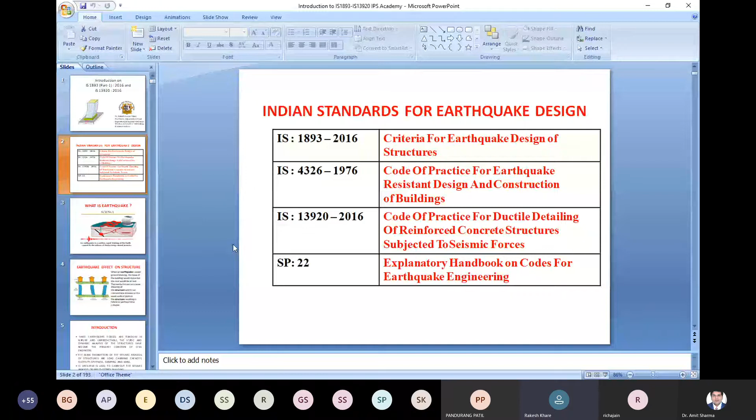You can do this in presentation mode, I think that would be better. F5 or something. Should I stick with this, sir? Skip, not escape. You can present in this complete presentation mode. If it is not possible, it's okay, otherwise the slide show would be better. It is not coming, sir. Actually, I have done this also. If people are comfortable, then it's okay. I think it's visible, okay.

So what is earthquake? An earthquake is a sudden, rapid shaking of the earth caused by the release of strain energy stored in rocks. Various theories are there: tectonic plate theory and elastic rebound theory. This presentation is not for the details of seismology, so I'll continue with the presentation.

Next slide, what is the effect of earthquake relevant to IS 1893 and 13920? Effect of earthquake: when an earthquake causes ground shaking, the base of the building would move, but the roof would be at rest. Inertia forces can cause shearing of the structure, which can concentrate stresses on weak walls or joints in the structure, resulting in failure.

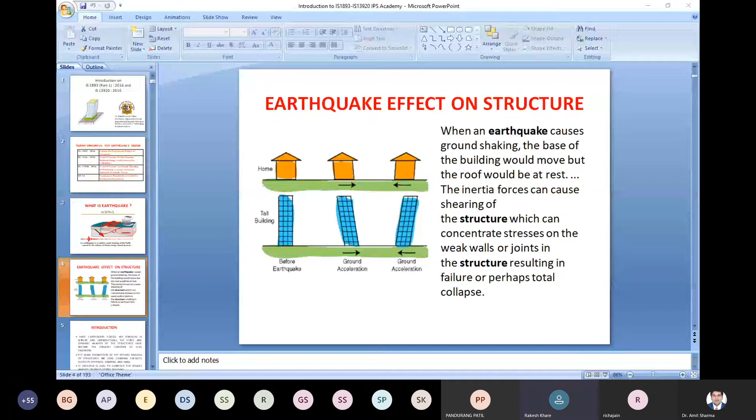Next slide. Since earthquake forces are random in nature and unpredictable, the static and dynamic analysis of the structure have become the primary concern of civil engineers. Main parameters in the seismic analysis of structures are load carrying capacity, ductility, stiffness, damping, and mass. IS 1893:2016 is used to carry out the seismic analysis of multi-story buildings.

Earthquake resistant structures.

Earthquake resistant or seismic structures are designed to protect buildings to some or greater extent from earthquakes. According to building codes, earthquake resistant structures are intended to withstand the largest earthquake of a certain probability that is likely to occur at their location.

What is the largest earthquake? The largest earthquake, or maximum considered earthquake, is the earthquake which has a probability of 2% in the design life of the structure. So 2% probability in the design life of the structure has a return period of approximately 2475, or about 2500 years.

And then there's the design basis earthquake, which has 10% probability in the life of structures. With a 50-year design life of the structure, that earthquake can occur in 475 years. That is, the return period of the earthquake will be 475 years.

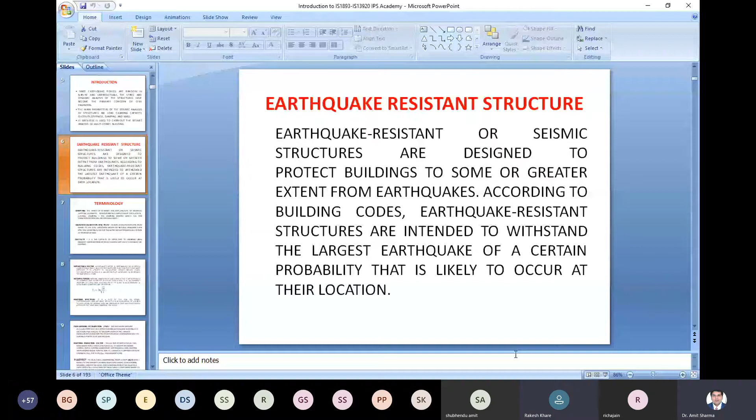Terminology used in IS 1893. They are: damping, the effect of internal friction, inelasticity of material, slipping, sliding, etc., and reducing the amplitude of oscillation. So that is damping.

The critical damping is the damping beyond which the free vibration motion will not be oscillatory. So that is critical damping.

Damping: generally 5% damping is present in the structure. We consider 5% damping for RCC structures in general, and even in steel and masonry structures also. Now in 2016, 5% damping is considered. Earlier, steel structures were considering only 2% damping. Now those structures are also having 5% damping as per the 2016 code.

Design acceleration spectrum refers to an average smoothened graph of natural frequency for a specific damping ratio for the expected earthquake excitation at the base of a single degree of freedom system. That is the design acceleration spectrum, which we use in IS 1893.

Ductility: it is the capacity of a structure to undergo large inelastic deformations without significant loss of strength or stiffness. That is what ductility is.

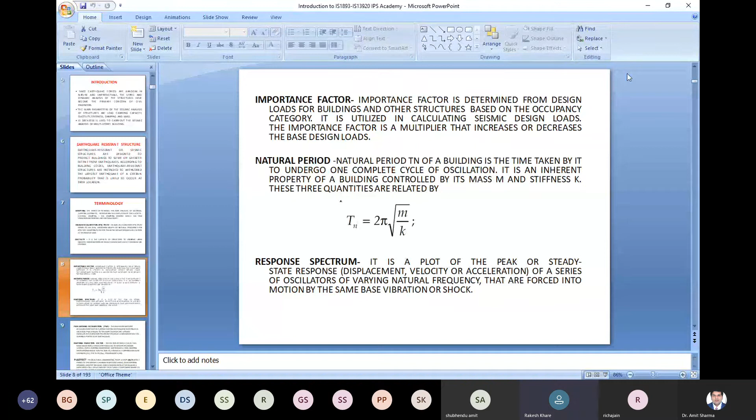They are different for different kinds of soil: hard soil, hard rock, medium rock or medium soil, and then soft soil. So three kinds of spectra are given in IS 1893. The response spectrum has, on the x-axis, capital T, and on the y-axis, SA over G, the spectral acceleration.

Peak ground acceleration: the maximum ground acceleration that occurred during earthquake shaking at a location, that is peak ground acceleration. This is equal to the amplitude of the largest absolute acceleration recorded on an accelerogram at a site during a particular earthquake.

Response reduction factor: by which the actual base shear force should be reduced to obtain the design lateral force during design basis earthquake shaking. The response reduction factor R basically depends on overstrength, ductility, and redundancy.

So what we do with the response reduction factor is reduce the earthquake force estimated by the maximum considered earthquake down to the level of the design basis earthquake. So we do not design for the largest earthquake, we design for the lower level earthquake and reduce it by, or divide it by, the response reduction factor, that is the R factor, which depends on strength, ductility, and redundancy.

In general, if IS 13920 is considered for detailing of RCC structures, then a special moment resisting frame has 5 as the response reduction factor. And if we do not consider it, for example in an ordinary moment resisting frame in zone 2, where it is not required, then in that case the R factor is 3, and it's different in different cases.

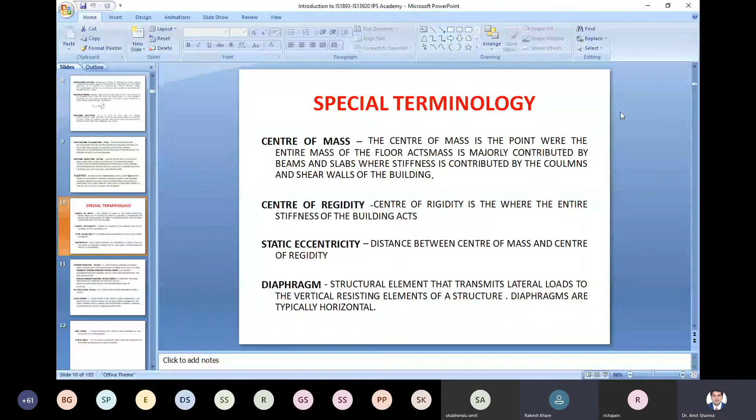Moment resisting frame: it is a rectilinear assembly of beams and columns with the beams rigidly connected to the columns. Ordinary moment resisting frame does not satisfy the criteria of IS 13920. A special moment resisting frame satisfies the criteria of IS 13920, that is, ductility is provided.

The special moment resisting frame and RC structural walls are RCC walls detailed and designed as per IS 13920. They will act as a lateral force resisting system, meaning they will resist earthquake forces. If they are not designed as per IS 13920, they will only resist gravity forces.

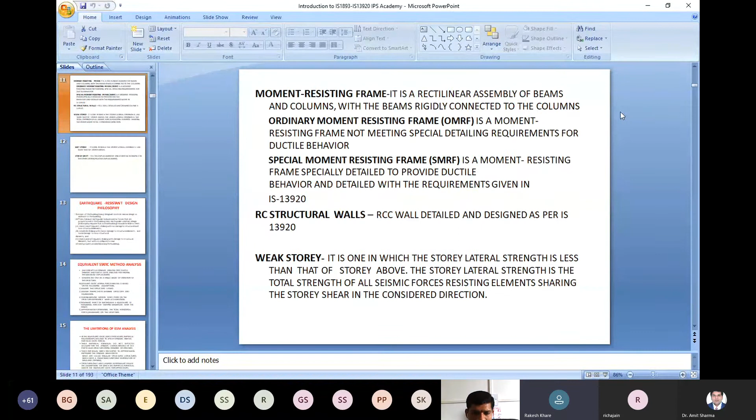Weak story is one in which the story lateral strength is less than that of the story above, so that story will be weak story. Lateral strength is the total strength of all seismic force resisting elements sharing the story shear in the considered direction.

Soft story is one in which the story lateral stiffness is less than that of the story above. So in weak story, strength is less; in soft story, stiffness is less.

Story drift is the displacement of one story with respect to the other story, that is, relative displacement between two stories. That is story drift.

Soft story: the Bhuj earthquake is known for soft story failure. There were many buildings having parking at the ground floor, so that floor was in fact a soft story. That story was soft story, and many of the buildings failed in the Bhuj earthquake.

Earthquake resistant design philosophy - I've told you about maximum considered earthquake. In case of maximum considered earthquake, we call it severe shaking also. So mass of the building being designed controls seismic design in addition to stiffness, because earthquake induces inertia forces that are proportional to the building mass.

Earthquake resistant design philosophy requires that normal buildings should be able to resist minor shaking with no damage to structural and non-structural elements, for minor and frequent earthquakes - that is design basis earthquake. Moderate shaking causes minor damage to structural elements and some damage to non-structural elements.

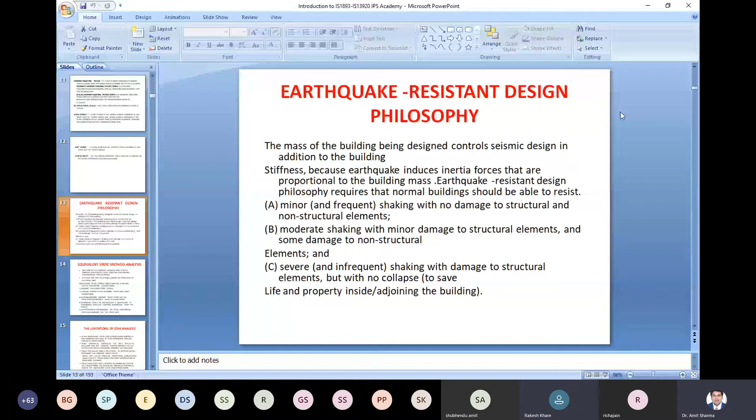Design basis earthquake is one earthquake which may repeat, or which has a return period of 475 years. And maximum considered earthquake is normally approximately 2500 years.

Equivalent static method analysis: when the earthquake occurs, it is transferred to the buildings as a response. That acceleration multiplied with mass gives you force, lateral force over the buildings or structure. So how can we design? There are two methods of designing structures: static method or dynamic method. In equivalent static, the phenomena is in fact dynamic, but we equivalently find out the static forces and design the structure. So the concept divides dynamic analysis into partly dynamic and partly static analysis for finding the maximum displacement.

It is restricted only to a single mode of vibration of the structure. We can show only single mode.

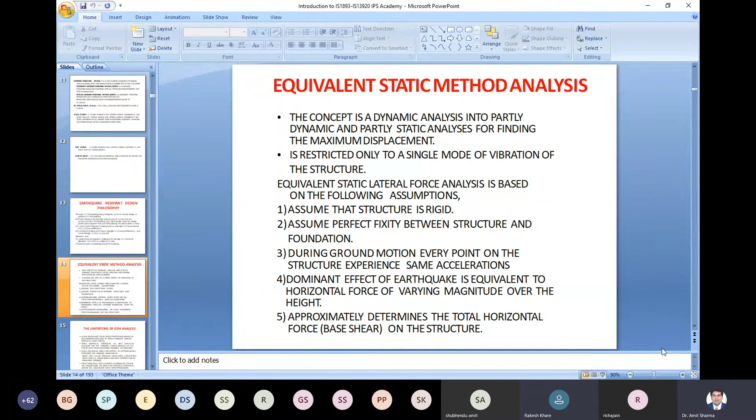Equivalent static lateral force analysis is based on the following assumptions: assume that structure is rigid, assume perfect fixity between structure and foundation. During ground motion, every point on the structure experiences the same acceleration. The dominant effect of earthquake is equivalent to a horizontal force of varying magnitude over the height, which approximately determines the total horizontal force, base shear, on the structure.

What are the limitations of ESM analysis, equivalent static method analysis? In the equivalent static force procedure, empirical relationships are used to specify dynamic and inertial forces as static forces. These empirical formulas do not explicitly account for the dynamic characteristics of the particular structure being designed or analyzed.

These formulae were developed to approximately represent the dynamic behavior of what are called regular structures, structures which have a reasonably uniform distribution of mass and stiffness. The structures that are classified as irregular violate the assumptions on which the empirical formula is used in the equivalent static force procedure. So in case of irregular structures, we need to consider the dynamic analysis.

Equivalent lateral shear force along two orthogonal axes. In fact, earthquake occurs in all three directions, but we design structures in general for two orthogonal horizontal directions.

Vertical direction normally is not required because the maximum earthquake which may occur in the vertical direction is equal to gravitational acceleration. So in that case, if it is downward direction, we have twice the forces, and more than this factor of safety is available in the structure. And if it is upward direction, then it is equal to the acting load, so there is no force in fact.

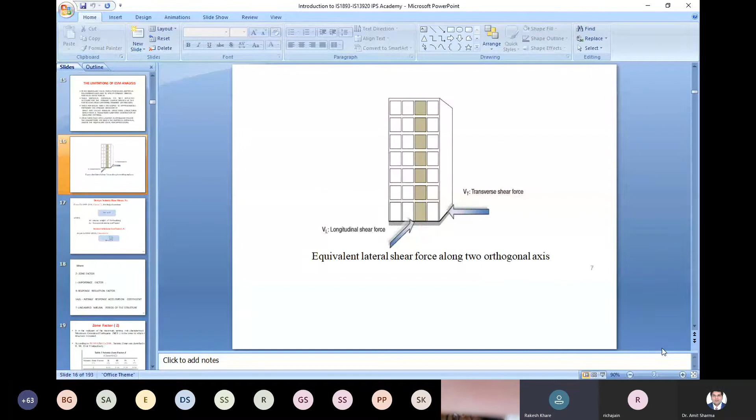Design seismic base shear: while designing these structures, we need to calculate the base shear VB. VB is calculated by AH into W. AH is the horizontal seismic coefficient, and W is the seismic weight of the building.

Horizontal seismic coefficient AH is given by clause 6.4.2, that is Z I SA by 2 R G, or Z by 2 into I by R into SA by G. We can split it like this: Z by 2, I by R, SA by G. Z is zone factor.

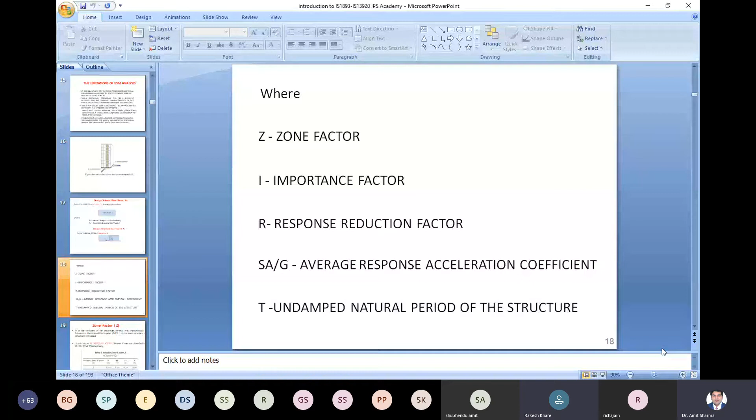I is importance factor, R is response reduction factor, SA by G is average response acceleration coefficient, corresponding to T, the undamped natural period of the structure. In fact, Z, the zone factor, is considered as maximum considered earthquake divided by 2, which you can consider as the design basis earthquake. Importance factor—already we have discussed hospital buildings or important buildings have more than one importance factor. So we increase the level of earthquake, then our response reduction factor, that ductility is considered, then we need to reduce the forces so that the structure is light. But of course the structure will damage and should not collapse, so to avoid collapse we need to provide ductility.

Zone factor is the indicator of the maximum seismic risk characterized by the maximum considered earthquake in the zone in which the structure is located. As per IS 1893:2016, it is divided into 4 zones: 2, 3, 4, and 5. Zone factors are given in Table 3: Zone 2 is 0.1, Zone 3 is 0.16, Zone 4 is 0.24, and Zone 5 is 0.36.

It is like peak ground acceleration—this is peak ground acceleration, 0.36 G in zone 5. I told you that the Bhuj earthquake had a level of 0.6 G, so in that way this value is definitely less.

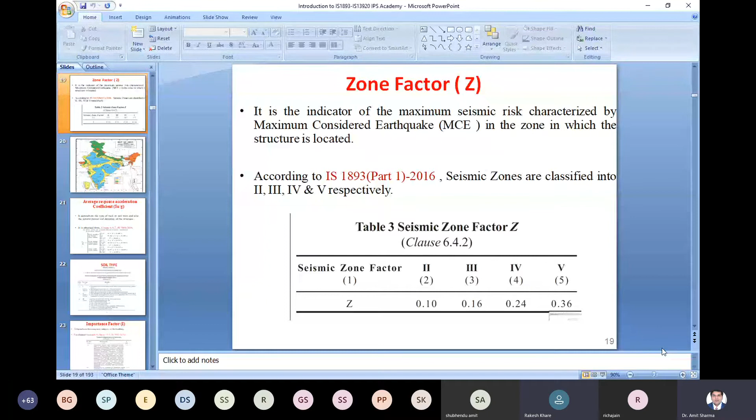But somehow our procedure is such that it takes care of so many things, and the structures designed as per IS 1893 do not fail during earthquake, at least do not collapse. They will not collapse at least during the severe-most earthquake. Definitely collapse will be avoided, though damage can take place.

Assam and other northeastern states, about 7 states, and then Bhuj in Gujarat, and a few places in Kashmir have zone 5. Near to that, zone 4 exists, and Delhi comes in zone 4. After that, other few places fall between zone 2 and 4—there is zone 3, like areas after zone 4 in Gujarat, and near there and in Maharashtra also some places, Madhya Pradesh a few places. So they are in zone 3, and south, Koyna and other areas, they are also zone 3.

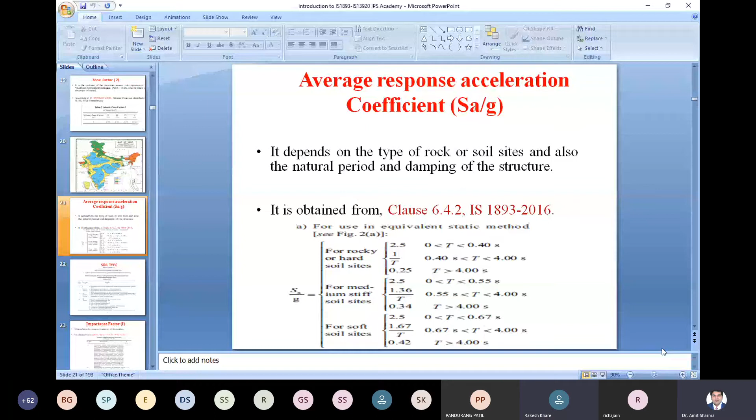Soil types are also defined by IS 1893. Soil type 1 is rock or hard soil, soil type 2 is medium or stiff soils, and soil type 3 is soft soils.

What is hard rock or hard soil? Well-graded gravel or well-graded sand, both with less than 5% passing 75 micron sieve, well-graded gravel-sand mixtures with or without fines, poorly graded sand or clayey sand, all having N above 30, and stiff to hard clays having N above 30, where N is the standard penetration test value, are considered rock or hard soil.

Medium or stiff soil has N between 10 and 30. Soft soil has N less than 10 - silts of intermediate compressibility, silts of high compressibility, clays, and likewise are soft soil.

Importance factor, already told you. The important building is 1.5. Now there is one category: residential or commercial buildings other than those listed, with occupancy more than 200 - this is an intermediate category, now introduced in 2016, that is 1.2, and all other buildings 1.0.

Residential buildings in general are 1.0, and if residential buildings have occupancy more than 200, or any commercial building also more than 200, with assembly involved, then it should have importance factor 1.2.

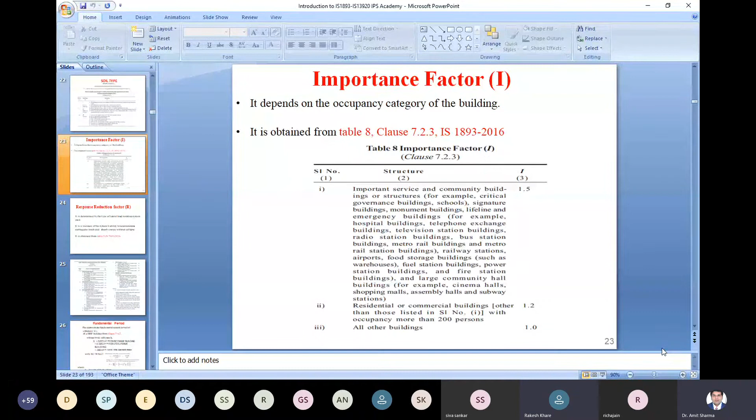Those structures have importance factor 1.5, and if they are industrial structures, it can be even higher than 1.5. IS 1893 part 4 is there for that - this was part 1.

Response reduction factor is determined by the type of lateral load resisting system used, the measure of the system's ability to accommodate earthquake loads and absorb energy without collapse. This is described in Table 9 of IS 1893 2016.

Response reduction factor for building systems: moment frame systems, OMRF 3.0, SMRF 5.0. Likewise for steel buildings - ordinary braced frames 4.0, special braced frames 4.5, and special braced frames having eccentric braces 5.0.

Structural wall systems: unreinforced masonry 1.5, unreinforced masonry designed with horizontal RCC bands 2.0, unreinforced masonry designed as per IS 4326 with horizontal RCC bands and vertical reinforcing bars 2.5, reinforced masonry buildings 3.0, confined masonry 3.0.

Why am I telling about masonry? Because even now 80% of buildings are masonry buildings. So buildings with ordinary RC structure have 3.0 and ductile RC structure 4.0. Flat slab structural system will have only 3.0, and if a flat slab is designed, it should have a lateral moment resisting frame also, some system for lateral moment resistance.

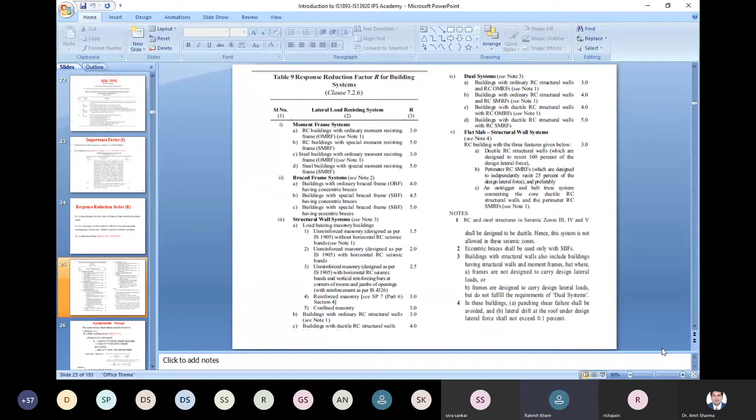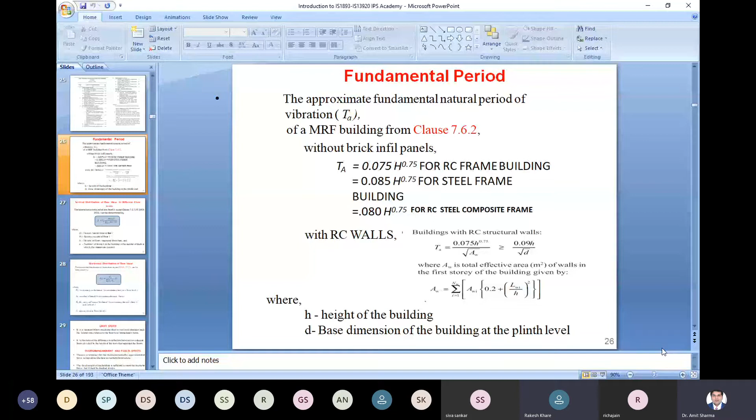Next slide is fundamental period. Approximate fundamental natural period of vibration is given in IS 1893, with the equation by which T is calculated - different for RC frame building, steel frame building, and buildings that may be steel composite or RC walls or other structures. So three equations are there; earlier there were only two equations.

Vertical distribution of base shear - base shear is calculated as VB equal to Ah into W, known to you now. How it is distributed over the stories: story shear QI equals VB multiplied by WI HI squared divided by sigma j equal to 1 to n of WJ HJ squared.

What is WI? Seismic weight of floor I. HI is the height of floor measured from the base. N is the number of stories in the building, number of levels at which the masses are located. So this way a quadratic formula is used by which the story shear is distributed. It also allows linear distribution - one who wants linear distribution can also use it.

Horizontal distribution of base shear is also defined, as per FEMA, for how the horizontal base shear is distributed.

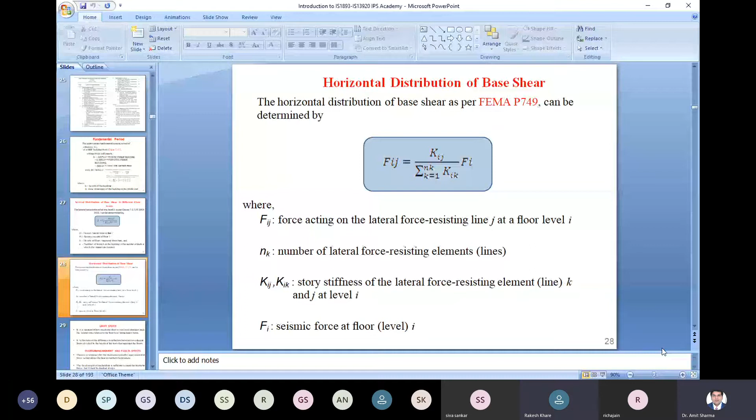Next slide, story drift. Story drift is a measure of how much one floor or roof level displaces under lateral force relative to the floor level immediately below. It is a ratio of the difference in deflection between two adjacent floors divided by the height of the story that separates the floors - so the drift ratio, story drift, is the difference in deflection divided by the story height.

There is a tendency for the moment created by equivalent static force acting over the base to overturn the structure. Dead weight of the building is sufficient to resist the overturning force, but it must always be checked.

Some considerations while calculating seismic weight: percent consideration of imposed load. Total live load is not considered for calculating earthquake forces. If superimposed load is up to 3 kN per meter square, only 25% of the mass is considered. If live load is above 3 kN per meter square, 50% of the live load is considered. This is because the whole live load may not be there in occupation, and it is moving, not fixed. If the imposed load is fixed at some place, full load must be considered. If not fixed, during earthquake it may change position and act in reverse direction, sometimes resisting the movement. So only 50% live load is considered.

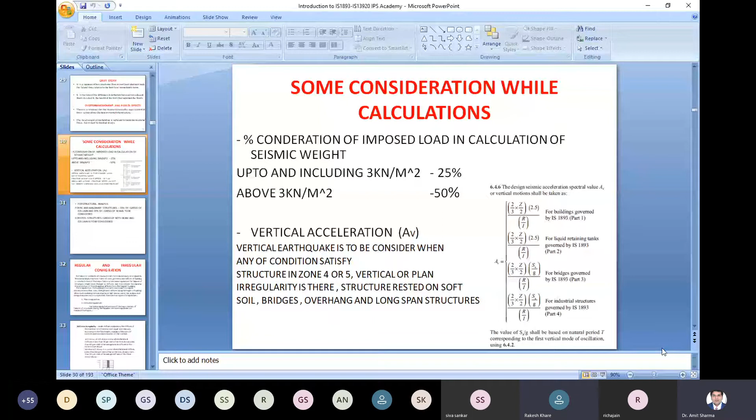For structural analysis of RCC and masonry structures, 70% of gross moment of inertia of column and 35% of gross moment of inertia of beam is to be considered, because cracking will take place. So 100% moment of inertia should not be considered for relative stiffness calculation. Column gross is taken as 70% since it is assumed columns crack less, while beams are taken at 35% since the tensile zone cracks totally and is resisted only by reinforcement. For steel structures, full gross moment of inertia of both beam and column is considered, since we do not reduce it when calculating earthquake forces.

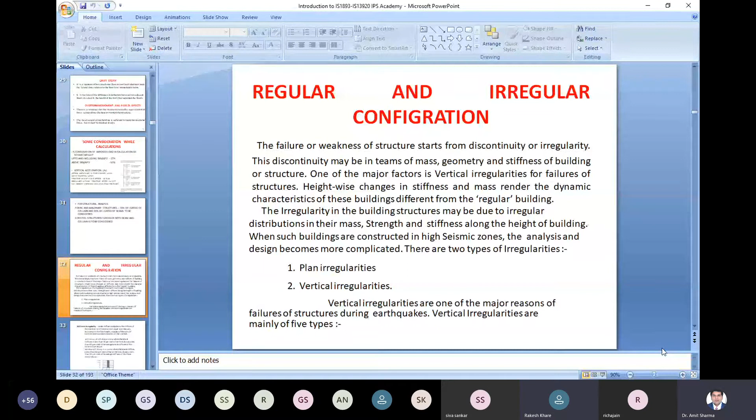Regular and irregular configuration: failure or weakness of a structure starts from discontinuity or irregularity, so these should be avoided. Two types of irregularities are defined: plan irregularities and vertical irregularities, which may arise due to irregular distribution of mass, strength, and stiffness along the height of the building. When such buildings are constructed in high seismic zones, analysis and design becomes more complicated. Vertical irregularities are one of the major reasons for failure of structures during earthquakes, and are mainly of 5 types.

Stiffness irregularity: the stiffness of members in a frame are not equal and vary according to floor height, modulus of elasticity of concrete, and moment of inertia of the member. Soft story is one in which lateral stiffness is less than 70% of the story above, or less than 80% of the average lateral stiffness of the 3 stories above. Extreme soft story is one in which lateral stiffness is less than 60% of that in the story above, or less than 70% of the average stiffness of the 3 stories above.

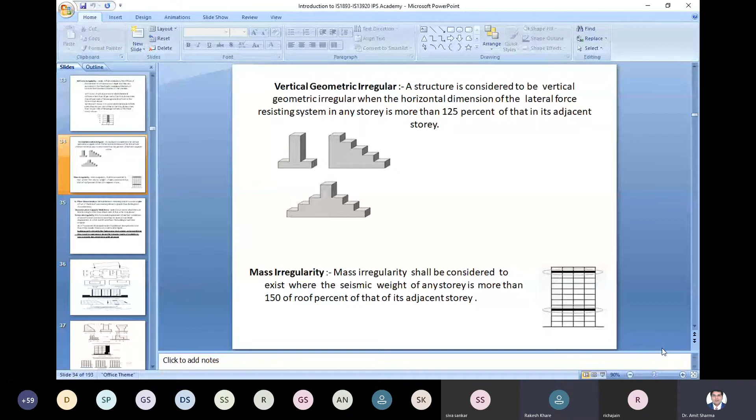A structure is considered vertically geometric irregular when the horizontal dimension of the lateral force resisting system in any story is more than 125% of that in its adjacent story. Mass irregularity exists where the seismic weight of any story is more than 150% of that of its adjacent story.

In-plane discontinuity may be possible in vertical elements resisting lateral force, where the in-plane offset of lateral force resisting elements is greater than the length of those elements. Discontinuity in capacity gives a weak story, which is one in which the story lateral strength is less than 80% of that in the story above. Torsional irregularity occurs when the maximum horizontal displacement of any floor in the direction of lateral force at one end is more than 1.5 times its minimum lateral displacement at the other end of the same floor; then the building is said to be irregular.

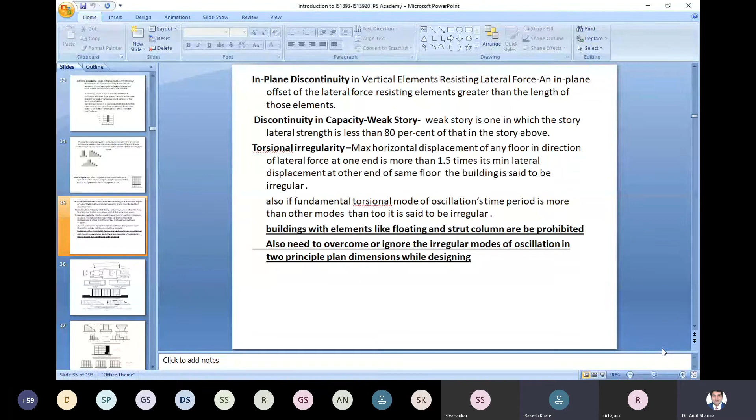Also, if the fundamental torsional mode of oscillation's time period is more than the other modes, the building is said to be irregular. Buildings with elements like floating and strut columns are to be prohibited. It is also necessary to overcome or avoid irregular modes of oscillation in the two principal plan dimensions while designing.

These are a few examples given in figure 3 of IS 1893, showing the definition of irregular buildings with plan irregularity. In the next page, figure 4 shows the definition of irregular buildings with vertical irregularities.

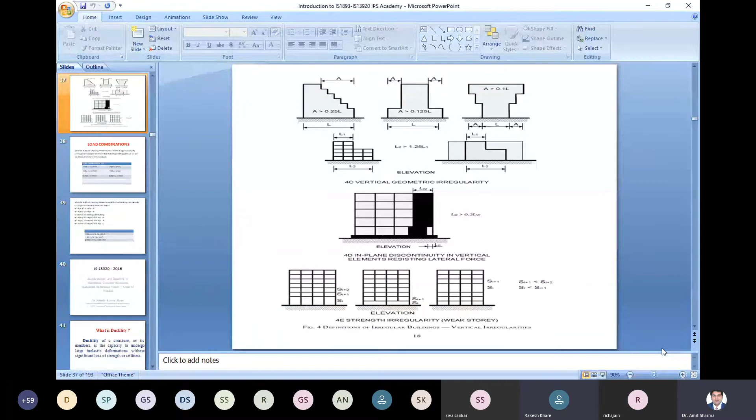And sometimes, if overturning moment is there, 0.9 times dead load is used. Stability is a question, so 0.9 times dead load. When dead load is providing stability against overturning, there is a probability of less dead load, so 0.9 dead load plus 1.5 earthquake load combination is also considered.

There are other combinations also when irregularities are there. When lateral load resisting elements are not oriented along two mutually orthogonal horizontal directions, then 0.3 times the other direction earthquake forces are also considered. And in case of 3D, the vertical direction earthquake is also considered. So these are the combinations in those cases of irregularities.

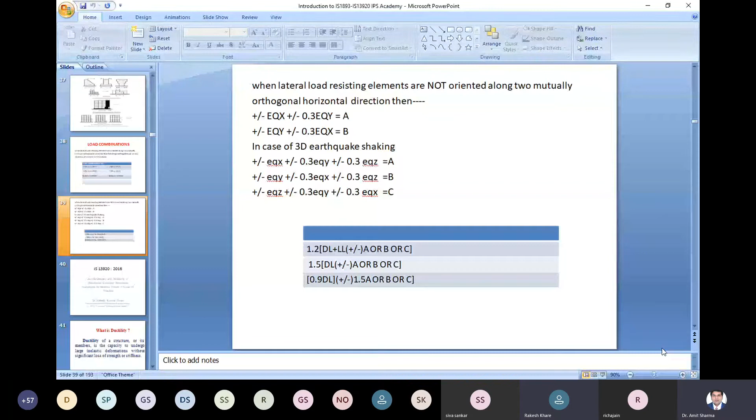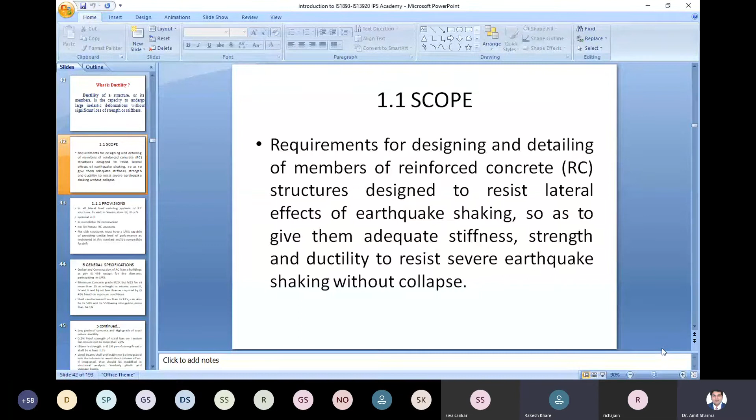The scope of this code is requirements for designing and detailing of members of reinforced concrete structures designed to resist lateral effect of earthquake shaking, so as to give them adequate stiffness, strength, and ductility to resist severe earthquake shaking without collapse. This is important. IS 1893 has a design philosophy that in the severe most earthquake, the maximum considered earthquake, structures should not collapse, and for RCC structure, if we want to avoid collapse, then this code is a must.

IS 13920 provisions are must. In all lateral load resisting systems of RCC structures located in seismic zone 3, 4, and 5, these provisions are mandatory. Optional in zone 2.

This applies to monolithic RC construction, not for precast RC structures. For precast RC structures, these provisions should be there, but there should be some special additional provisions also in precast. That is why it is said these provisions are not for precast RC structure alone - additional provisions would be required in joints and other things. Because in RCC structures, monolithic construction is there, so if these provisions are followed, monolithic construction will give good resistance. In precast, there are jointed connections, so even though you are providing these provisions, joints are weak, and it will be difficult to avoid collapse. That is why for precast structures, special provisions may be required.

Flat slab structures must have a lateral force resisting system (LFRS) capable of providing similar level of performance as envisioned in this standard, and be compatible for drift. So the lateral force resisting system should be there in flat slab structures.

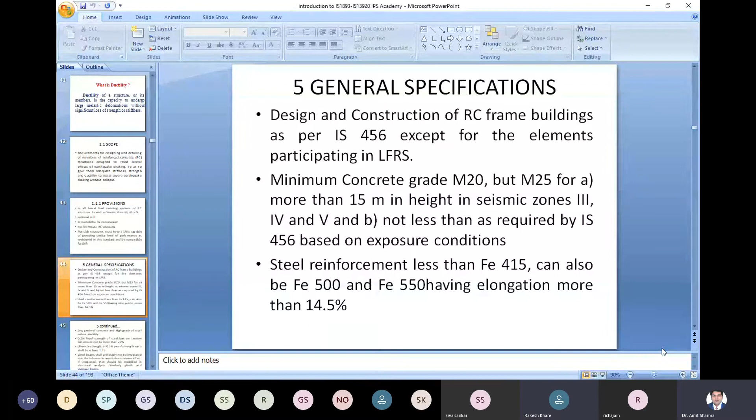Low grade of concrete and high grade of steel reduce ductility. That is why less than M20 is not used, and in buildings more than 15 meters high, M25 is recommended, and high grade of steel reduces ductility. But if it is giving 14.5% elongation, that is recommended. The 0.2% proof strength of steel bars on tensile test should not be more than 20%, and it is also recommended that ultimate strength to 0.2% proof strength ratio shall be at least 1.15, with a minimum 15% ultimate strength elongation.

Lintel beams shall preferably not be integrated into columns to avoid short column effect. If integrated, they should be modeled in structure analysis, similarly for plinth and staircase beams. If you do not model and provide it on site, there is a possibility of short column effect.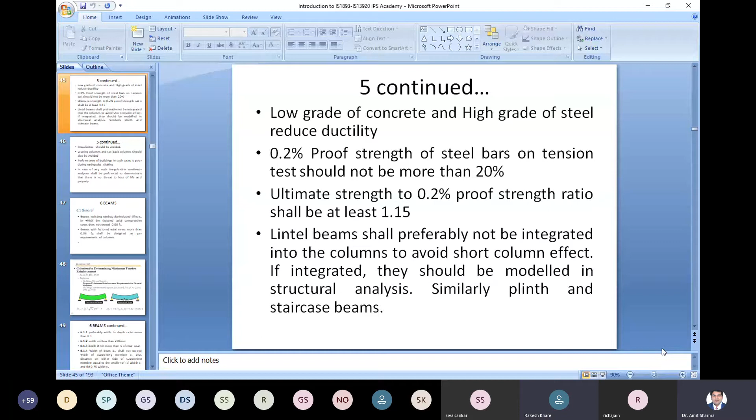What is short column effect? It is when you are designing a long column but providing a short column, so the column stiffness becomes higher and it attracts more force, and the distribution disturbs. Since it is not designed for that force, the column may fail.

Irregularity should be avoided. Leaning columns and setback columns should also be avoided. Performance of buildings in such cases is poor during earthquake shaking, which is why they should be avoided. In case of any such irregularities, nonlinear analysis shall be performed to demonstrate that there is no threat to loss of life and property.

What are the provisions for beams in flexure? Beams resisting earthquake induced effects in which the factored axial compressive stress does not exceed 0.08 FCK are defined as beams. If beams have factored axial stress more than 0.08 FCK, they shall be designed as per the requirements of columns also. Otherwise, if it is less, normal beam provisions apply.

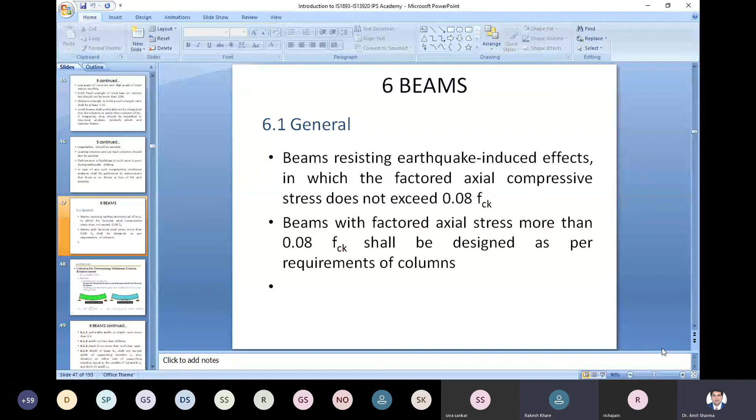What are the criteria for determining minimum tension reinforcement? As in IS 456/1978, there are some references by which the minimum criteria for determining minimum tension reinforcement are given.

For beams, preferably the width to depth ratio should be more than 0.3. Width should not be less than 200 mm in any case. Depth D should not be more than 1/4 of clear span. Width of beam shall not exceed width of supporting member C2 plus distance on either side of the supporting member, equal to the smaller of width C2 and 0.75 times the width.

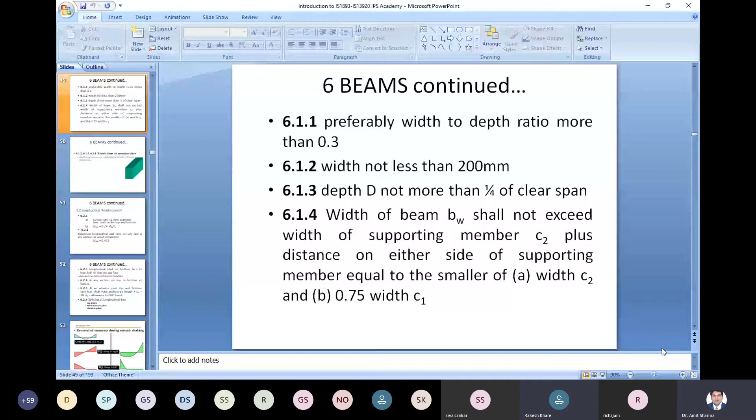Restrictions on member sizes exist because ductility provisions are valid only for members of usual proportions. If abnormal proportions are present, ductility will not be achieved.

Longitudinal reinforcement: at least two 12 mm diameter bars, each at top and bottom, so minimum 4 bars total. Rho minimum, the minimum reinforcement ratio, is 0.24 times square root of FCK upon Fy. The maximum longitudinal steel ratio on any face of any section, to avoid congestion, Rho maximum is 0.025, meaning 2.5% steel is the maximum that should be provided in beams.

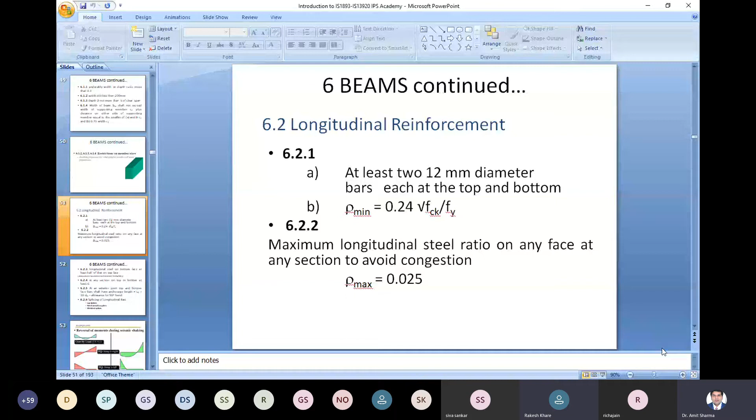Longitudinal steel on the bottom face should be at least half that on the top face. At any section, top or bottom, at least 1/4 of the reinforcement should be present. This clause, 6.2.3, is very important: bottom face at least half. Near support, whatever top steel is provided, minimum half of that should be there on the bottom. At any section, top and bottom should have at least 1/4 of top reinforcement near the support.

At an exterior joint, top and bottom face bars shall have anchored length LD plus 10 times bar diameter, with allowance for a 90-degree bend subtracted. So when there is an exterior joint, the top bar continues to development length from the face of the column, that is development length plus 10 times bar diameter, and you can reduce for the 90-degree bend allowance. Similarly for the bottom bar also.

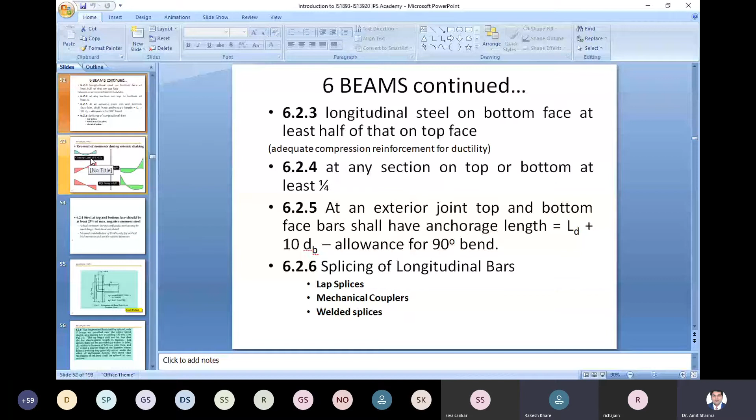Splicing of longitudinal bars: lap splices, mechanical couplers, and welded splices are allowed. Lap splices should be provided where yielding will not occur, that is in zones other than 2 times the effective depth from supports; somewhere in between it can be provided. Mechanical couplers are suggested. Welded splices should be avoided, but ductile welds can be used. Not more than 50% of bars should be spliced at any section.

Why was 50% reinforcement in the bottom required? Because of reversal of moment during seismic shaking. The moment may be in the opposite direction, and earthquake force may come from both directions, to and fro. Under gravity load only the top is in tension, but when shaking goes to the right, the left bottom is in tension, and straight to the left, the right bottom is in tension. That is why the bottom should also have some reinforcement near the support.

Steel at top and bottom face should be at least 25% of the maximum negative moment steel, anywhere 1/4, as we have already seen.

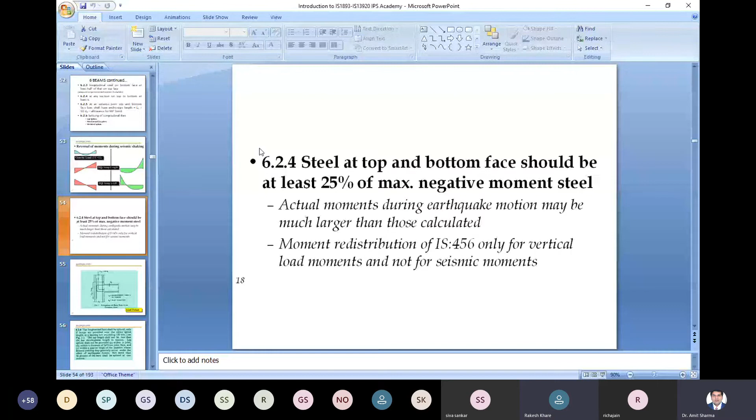This was the condition of splicing: hoops are provided over the entire splice length at a spacing not exceeding 150 mm. Lap length shall not be less than the bar development length in tension. Lap splices shall not be provided within a joint, within a distance of 2D from the joint face, and within a quarter length of the member where flexural yielding generally occurs. Not more than 50% of the bars shall be spliced at one section.

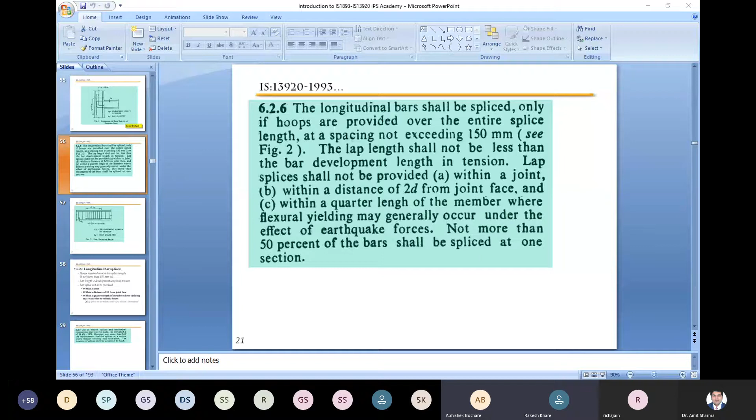That is what we have discussed so far.

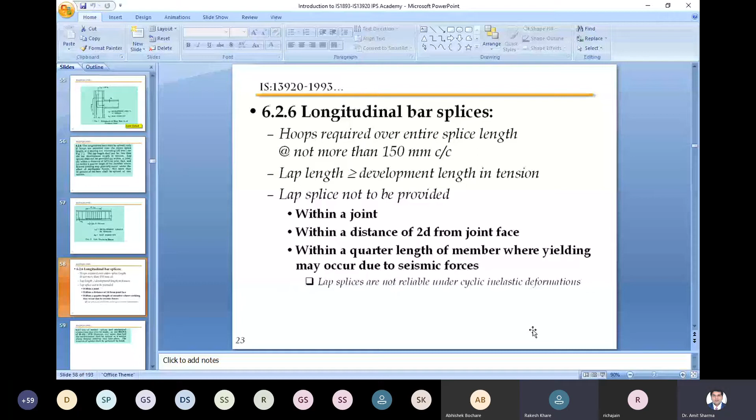Beams continued. Transverse reinforcement.

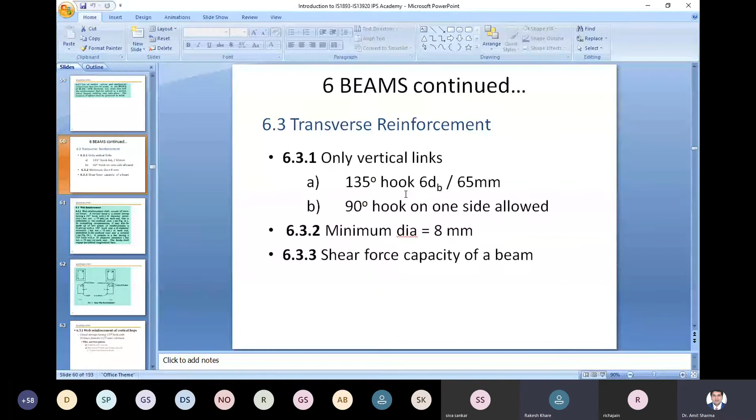Only vertical links with 135-degree hook, 6 times diameter. This has been amended. The 135-degree hook should have 75 mm or 8 times bar diameter extension; 6db was written there earlier, so it is amended. A 90-degree hook on one side is allowed, with minimum diameter 8 mm, for shear force capacity of a beam.

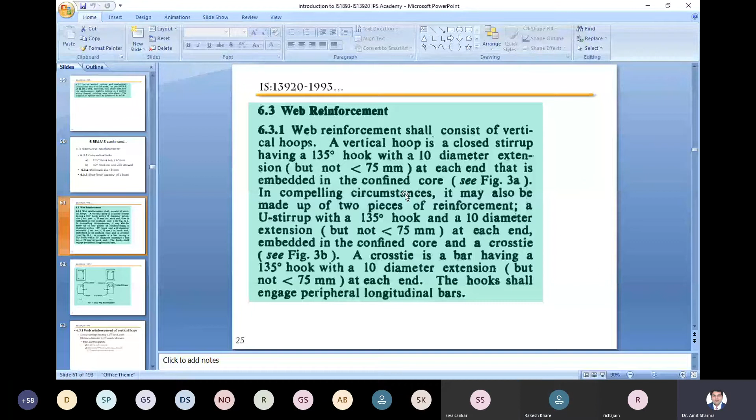Sometimes there is difficulty in having a stirrup in the beam. Then this U stirrup and cross tie shown in figure 3b can be used like this, so it can be provided. It will help in placing the reinforcement at the side.

We have reinforcement with vertical hoops, 135-degree hook with 10 times diameter, greater than 75 mm extension.

Shear force to be resisted by the vertical hoops shall be the maximum of the calculated factored shear force as per analysis, and the shear force due to formation of plastic hinges at both ends of the beam plus factored gravity load from the span.

Slide aage kijiye Amit. Yes sir. It is not changing, sir. I have changed it from my side. Okay, this is okay. Yes, these are the equations.

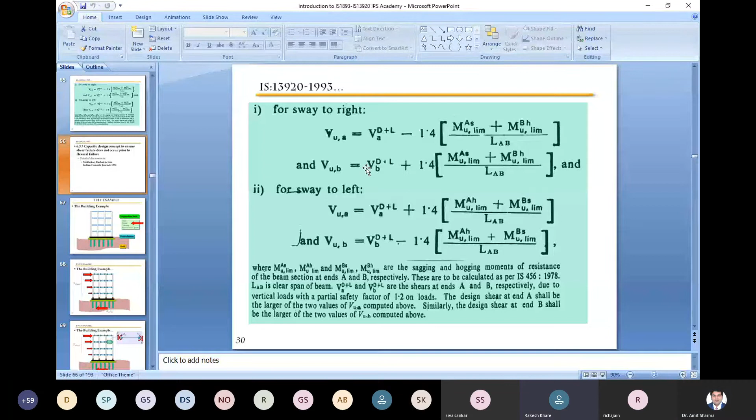Building example: what is there in this? Beam should fail first, but not column. Column should fail first, but not the beam column joint. And beam column joints can fail, but not the foundation. So the failure sequence is: slabs first, then beams, then columns, then beam column joints, then foundation, and then soil. This is the sequence of failure.

If soil fails first, the whole structure will collapse. Suppose soil is okay but foundation fails, then also the structure will collapse. The foundation has to be stronger than the structure. This is the capacity design concept given by Park and Paulay, New Zealand.

Foundation is not failing, but if beam column joint is failing and beam columns are not failing, then too the structure may collapse. So that's the sequence. Suppose beam column joint is okay, column is failing, but beam and slab are not failing, then the slab and beam will collapse and come down, and due to impact the whole structure will collapse. So sequence of failure should be slab, beam, column, joint, foundation, and soil.

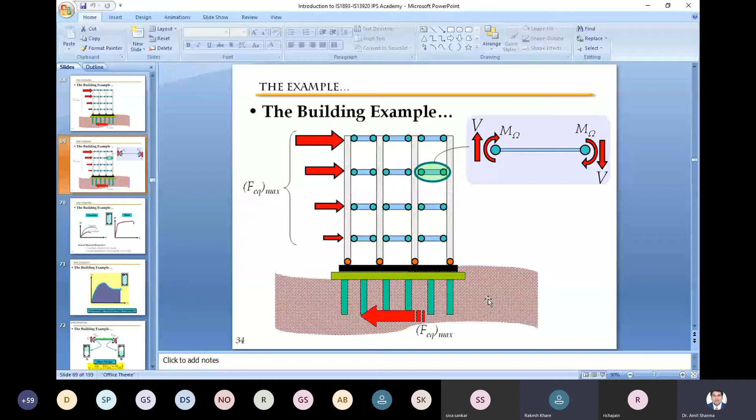Over strength moment hinge properties. M theta curve building example. So this simple graph, let's continue.

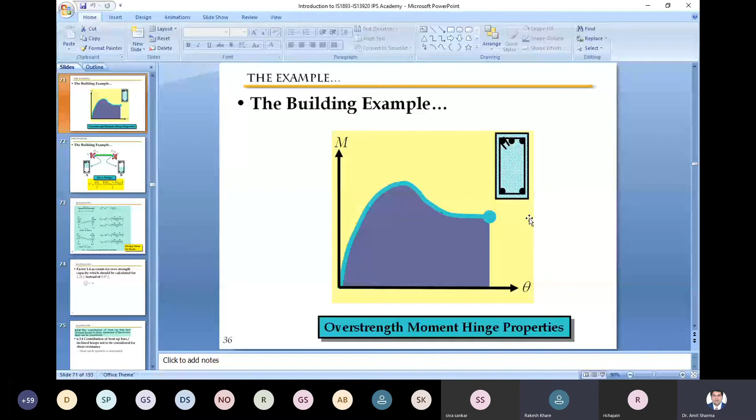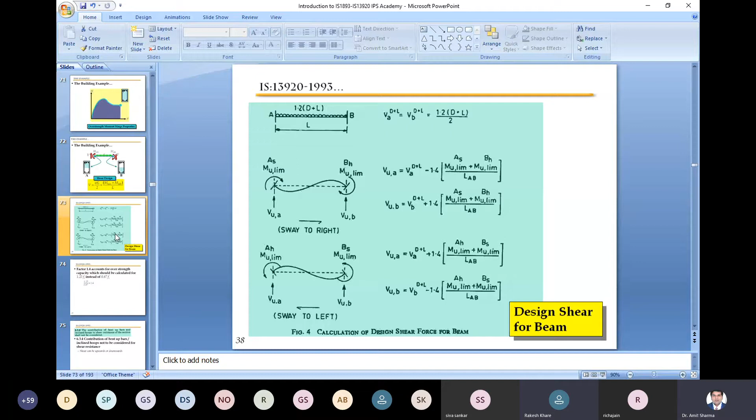Shear design concept is only explained here again. The slides repeat the same content.

Hoop spacing over 2D length at either end of beam not to exceed certain limits. This is a special confinement, a special confining reinforcement.

Hoops at the above spacing also apply over 2D on either side of the beam where flexural yielding due to seismic forces may occur. Elsewhere, spacing of vertical hoops should be less than or equal to d by 2.

So near the support, hoop spacing is less for confined concrete, giving us ductility over here. This is the special confinement reinforcement of beams.

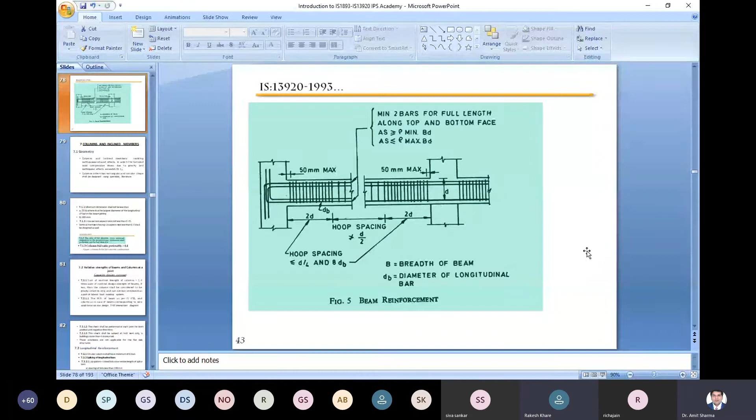Columns and inclined members. Columns and inclined members resisting earthquake induced effects are first defined. If axial compressive stress due to gravity and earthquake effect exceeds 0.08 FCK, those members are called columns.

Columns other than rectangular and circular shapes will be designed using specialist literature. Here, rectangular and circular detailing is given. Minimum dimension shall not be less than 20 times the bar diameter.

DB is the larger diameter of the longitudinal bar in the beam joining, or 300 mm, whichever is larger. You can see minimum dimension is 300 mm. At the same time, if the beam joining the column has 20 mm dia bars, then the minimum dimension of the column should be 20 into 20, that is 400 mm. And if it is a 25 mm bar, then the minimum dimension is 500 mm.

Imagine, so those 200 mm columns are no longer suggested by IS 13920. They are restricted. 200 mm columns are not allowed by 13920 now. Minimum is 300 mm, and even more dimension is required if beams have larger diameter bars.

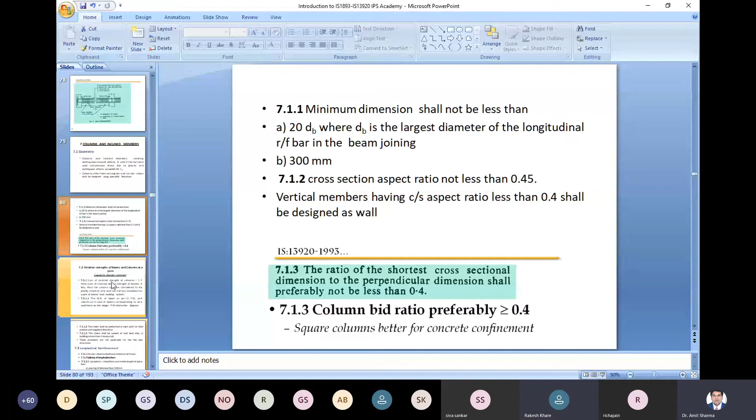Cross section aspect ratio should not be less than 0.45 - B by D ratio not less than 0.45. Vertical members having cross section aspect ratio less than 0.4 shall be designed as a wall. This is amended probably - instead of shortest cross section dimension to perpendicular dimension shall be not less than 0.4. Instead of 0.45, it is again 0.4 only, I think.

So for example, 200 by 500, a 200 column is not allowed. In fact, 300 by 700 column is okay, but 300 by 800 column will not be allowed. So if one dimension is 800, then 300 will not be allowed for the other.

Relative strength of beams and columns is a design, capacity design concept. Sum of nominal strength of column equal to 1.4 times the sum of nominal design strength of beam. You have seen these in case of shear - capacity design concept was applied.

Now in case of columns also, capacity design concept has to be applied. What is this concept? In beams, shear generated by limiting moment capacity should be added in design shear, and total shear capacity should be higher than that.

Now for columns, shear capacity of columns is also calculated, and it is checked that shear capacity of the column is more than the shear capacity at the joint. At the same time, flexural capacity, that is bending moment capacity of the column, should be more than the bending capacity of beams.

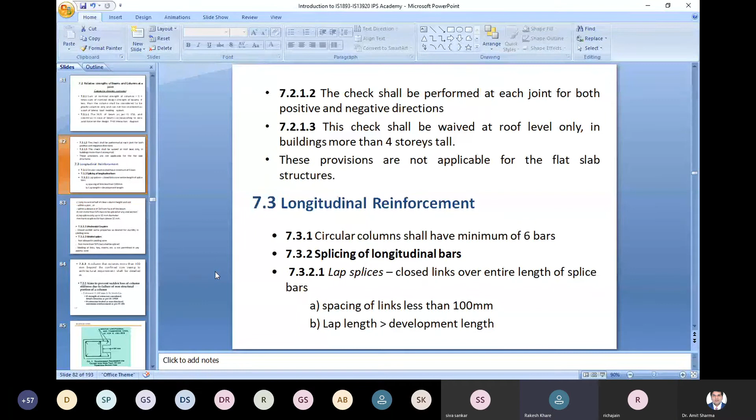Lap splices similar to beams, and spacing of links less than 100 mm. In beams it was defined at 150 mm, but in columns the links should be less than 100 mm, only in the central half of clear column height, and not within a joint or within a distance 2D from the face of the beam, similar to beams. Not more than 50% of bars to be spliced at any one section. Lap splices only up to 32 mm diameter. Mechanical splices are for bars above 32 mm. If longitudinal bars are more than 32 mm diameter, then mechanical splices are suggested and recommended, and not lap splices.

Mechanical coupler should exhibit the same properties as desired for ductility in the yielding zone. Welded splices are not allowed in the yielding zone. Not more than 50% of bars shall be spliced. Welding of links, ties, etc. is not permitted in any seismic zone.

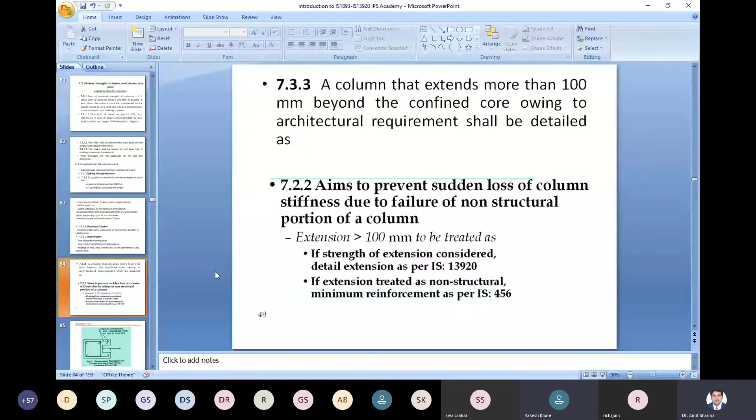A column that extends more than 100 mm beyond, so this confined core, owing to architectural requirements, will be detailed. This diagram is explaining that.

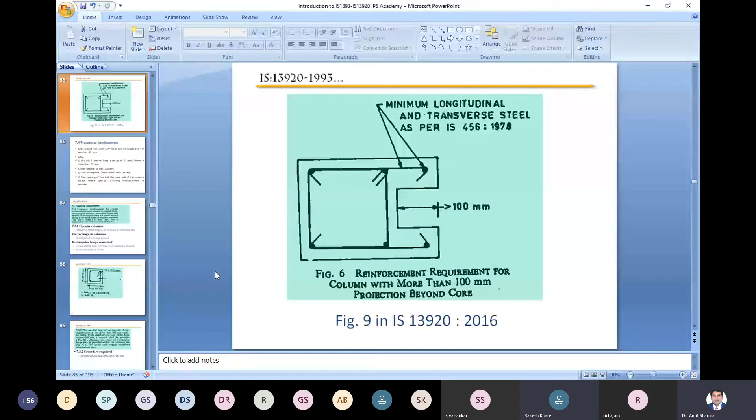Transverse reinforcement: closed links with 135-degree hook and 6D length, but not less than 65 mm. Again, this is amended, last slide.

So again this is amended: 8 times bar diameter and 75 mm. Closed links with 135-degree hook, similar to beams. Minimum diameter 8 mm for longitudinal bar up to 32 mm, 10 mm if more than 32 mm. Maximum spacing of legs 300 mm. Cross tie required when more than 300 mm. Maximum spacing of links is half the least side of the column, except where special confining reinforcement is required.

These are the few clauses which you have to consider for the spacing of links.

Transverse reinforcement, the same thing, here it is written correctly. Earlier code was having 135-degree hook, 10 times diameter or 75 mm. The same thing is there in the amended 2016 code also.

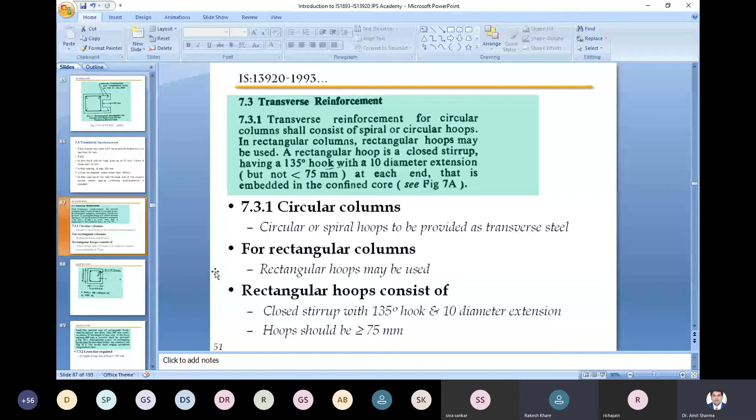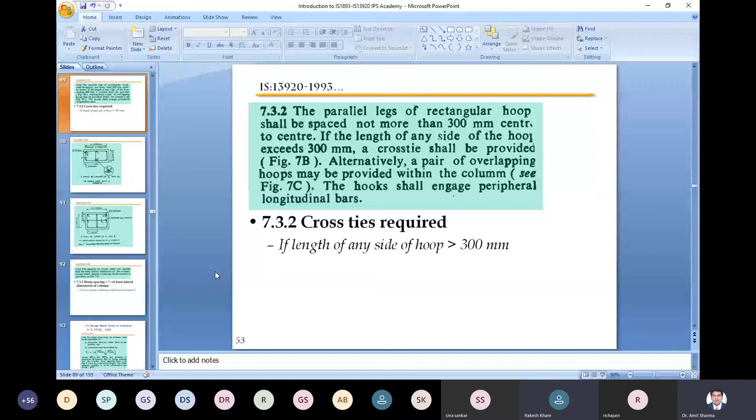Design shear force in column as per IS 13920-2016. This was earlier also in the 1993 code, the same thing. Similar to beam, 1.4 times MU limiting at one end and MU limiting at the other end, divided by height, story height. So this is the shear force in column.

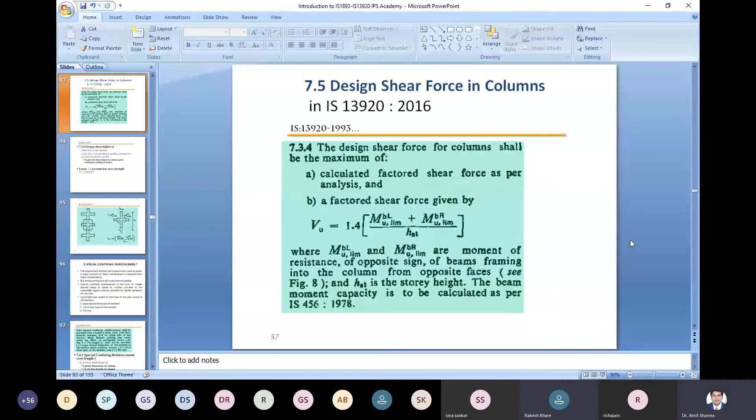In general, in IS 456, columns are not designed for shear force. Simple tie spacings are specified and those are to be provided as per IS 456. What's different is for IS 13920, this calculation is required and a check is required.

Special confining reinforcement is required in columns also. This requirement shall be met in beams and columns unless a larger amount of shear reinforcement is required from shear considerations. Here the same things are not for beams, there is a difference, it is mainly for columns. It was written in beams, but now all those things are not required for beams. Beams are separately already explained, so those will be for beams, and these are for columns.

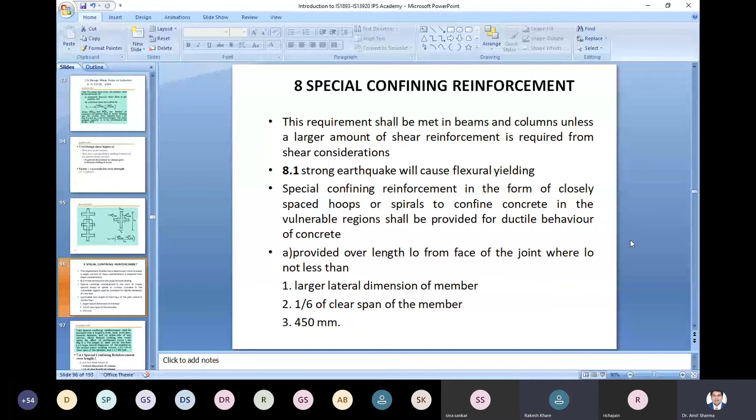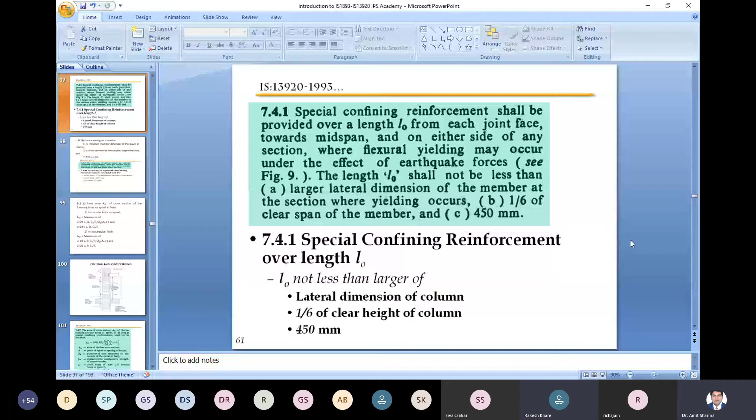Special confining reinforcement in the form of closely spaced hoops or spirals to confine concrete in the vulnerable regions shall be provided for ductile behavior of concrete, provided over a length L0 from the face of the joint, where L0 is not less than the larger lateral dimension of the member, 1/6 of clear span, and 450 mm.

Spacing shall not be more than 1/4 of the minimum member dimension of the beam or column, 6 times the diameter of the smallest longitudinal bar, or 100 mm. So these we have to check, not more than this spacing.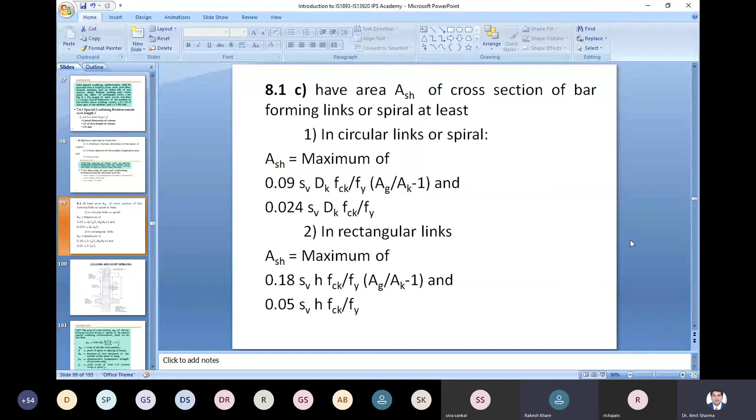And joint reinforcement as per clause 8.1. So when the beam confining is only on one side, you need to continue same confining reinforcement to joints also. And when from all four sides the joint is confining, column is confining at joint, then you can reduce that spacing to some extent.

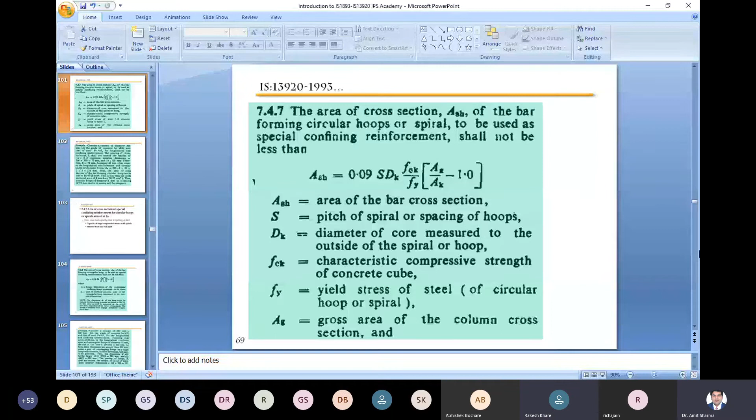Same formula which we have already seen. Here is one example. Next slide. How to calculate for that.

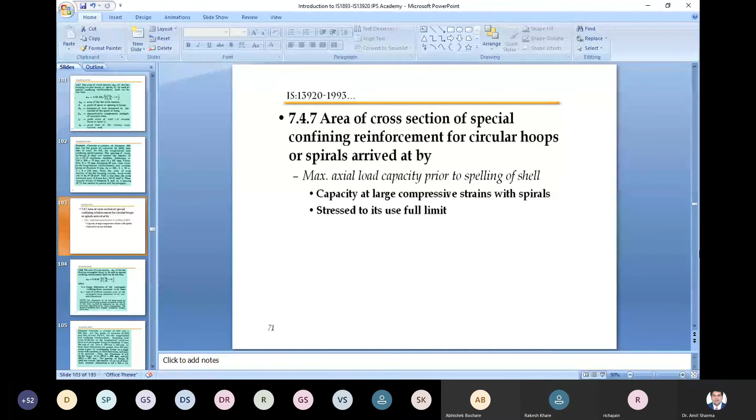Continue. Next. Same thing. Next.

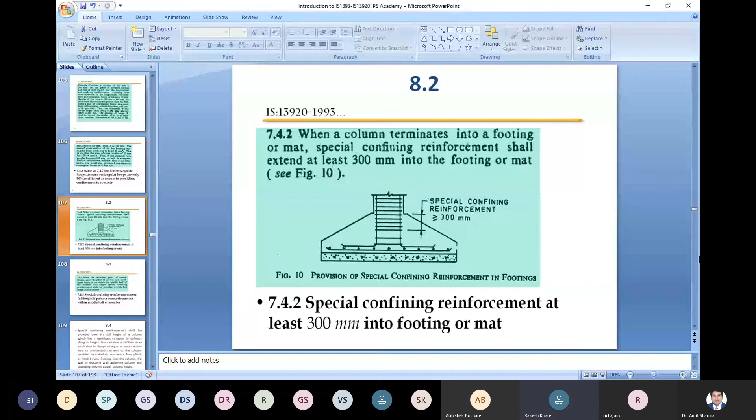Yes, here you can see in footing what should be there. At least 300 mm. Special confining reinforcement in the footing should be continued into footing or mat.

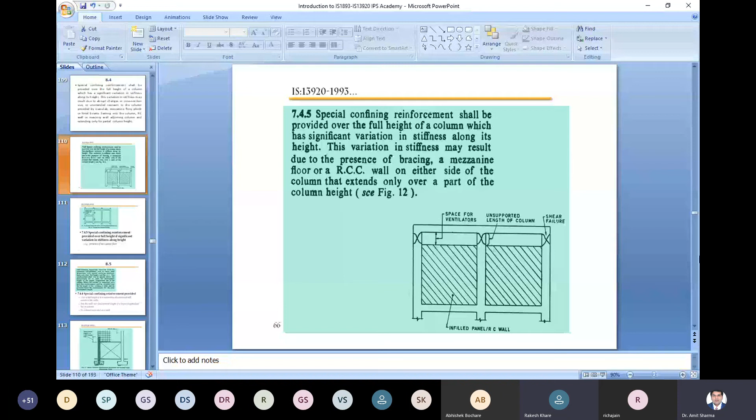Next. This is one example of that. Next. Continue. Same thing, example. Next. Yes.

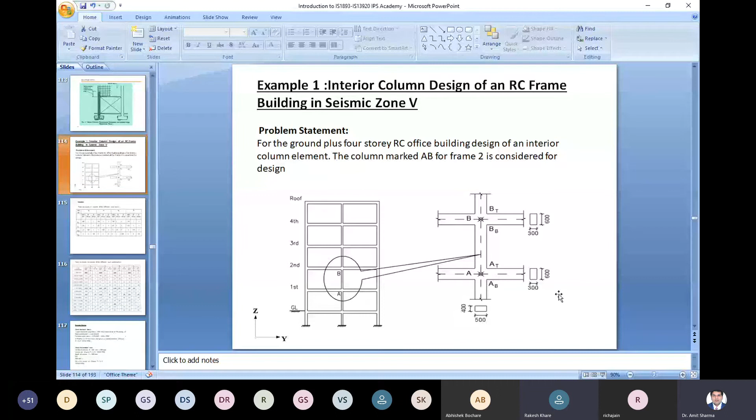Interior column design of an RC frame building, Seismic zone 5. Here one column is designed. Numerical example is given to calculate how to calculate forces. Then continue this, we'll skip this.

There is one more example, ductile detailing for columns. Then beam column joints, next slide.

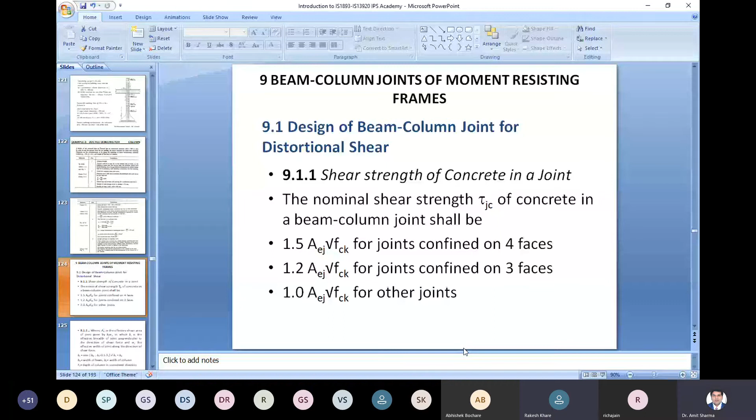Yes, beam column joints for moment resisting frames. Design of beam column joint for distortional shear. Shear strength of concrete in a joint. Nominal shear strength tau JC of concrete in a beam column joint shall be like these criteria we have to satisfy, for beam column joints also. This check we have to apply in beam column joints.

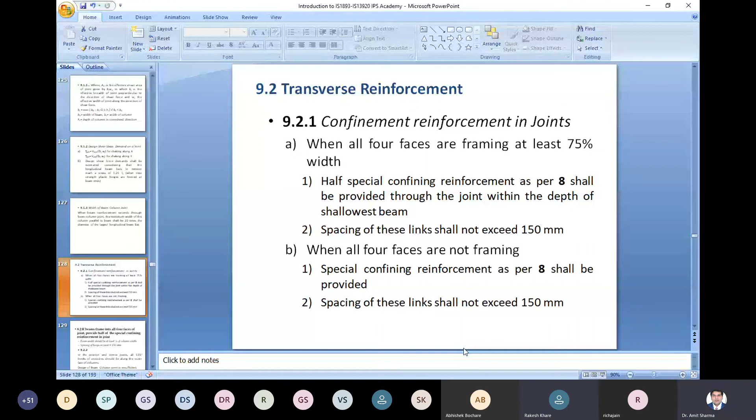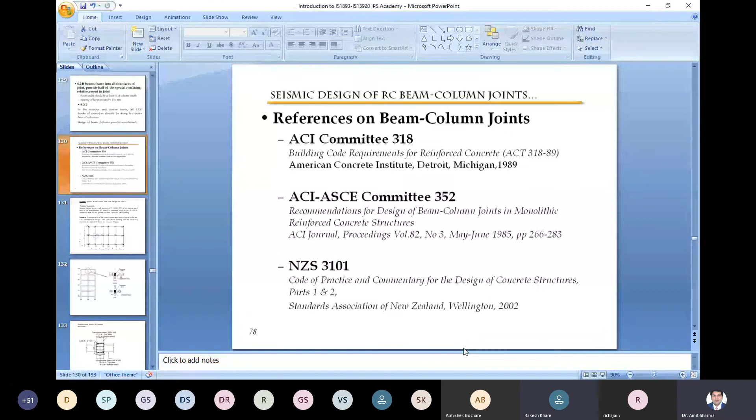Next, transverse reinforcement. Confinement reinforcement in joints when all four surfaces are framing at least 75% width, that is called confinement. We have already discussed this. Skip those slides, example problems.

Requirements of this section apply to special shear walls. Now these are the provisions for shear walls. We'll quickly go through in 1 minute.

Minimum thickness shall not be less than 150 mm, and 300 mm for buildings with coupled shear wall in seismic zones. Minimum thickness must conform to IS456 for fire resistance in any case, thickness greater than 150 mm. Thinner walls have a tendency to buckle out of plane.

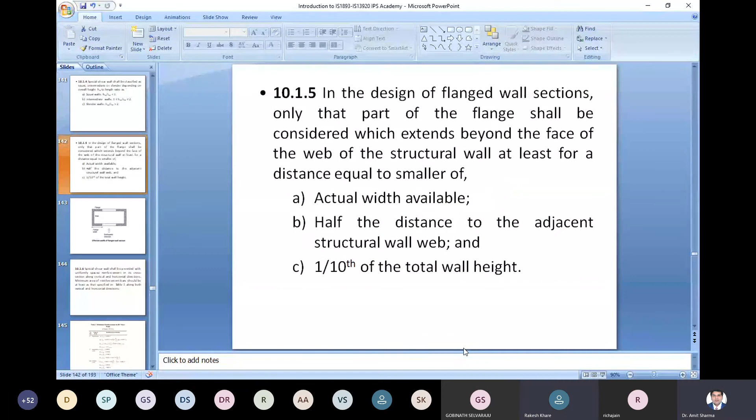Equations for designing shear walls are given in IS 13920. Design for axial force and bending moments are given there. So in the annexure of IS 13920, equations are given for moment.

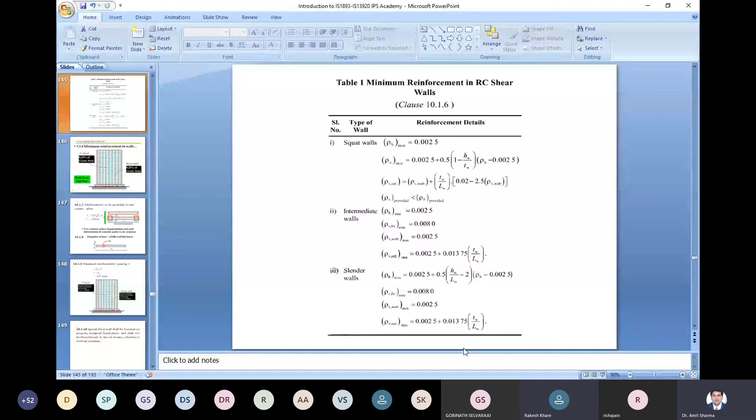We need to calculate boundary elements in shear walls. I will skip all these slides now in shear walls, considering this as an advanced topic, and time is also not permitting me to continue this. So thank you at this moment.